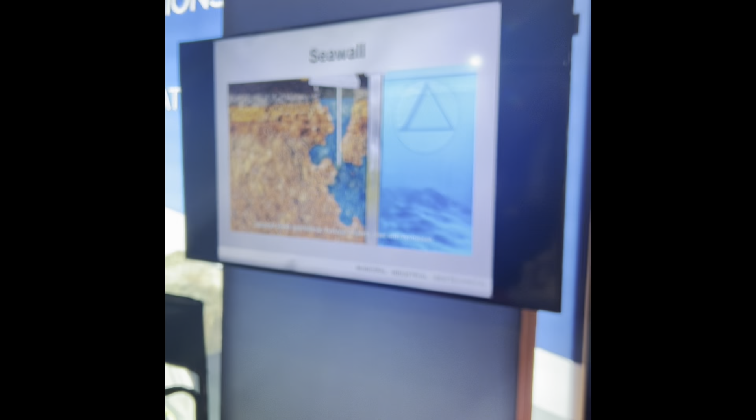So in that aspect, we would do something called grouting around the whole structure, and then it's all waterproof. Because if you think you only have one leak and fix it, water has already traveled, and now you see another one and another one. So depending on how many cracks the structure has, you may be best off just grouting the entire thing.

He works with the stack running off of a PC. Yep, so you can use a PC, an iPad, tablet, anything like that, and plug it into the Volanti system. And Volanti runs the stack on its own power, and runs the stack on the screens.

Yeah, definitely. Well, let's do this. We are leaving Friday, so maybe.

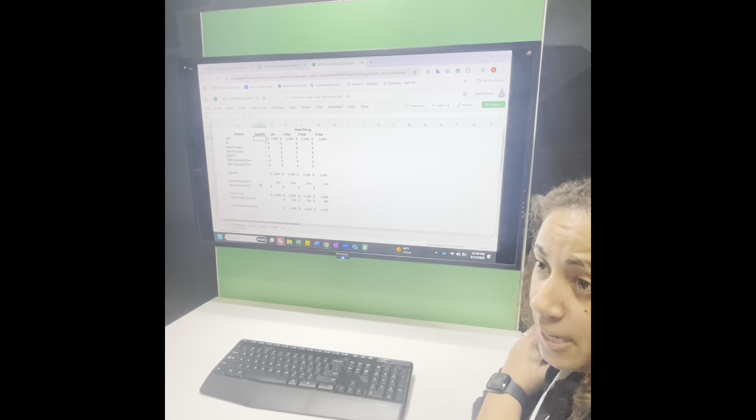And there's no limit on the quantity of projects -- completely unlimited. I haven't seen anyone max out, and I've been here 3 years. We've got users that have used our software for 5 plus, 10 plus years.

Any questions? Yeah, I can scan your badge, and then send you some more info. Definitely, I want to see. Yeah, I want to get you set up together, try to get you a demo on a trial. That way, when we do the demo, we'll be more geared towards your business, and it'll make things more understandable right now.

Measurements by takeoff, so you can see what's all included, and then item cost by takeoff. So if you attach what we call an assembly, which would be all of your materials together, that's where you'd get this material list, whether it's labor or material. You can build it out into an estimate. So here's the dashboard, and then you'll go in and enter your pricing here on the back end, add in markups, material cost, overhead, additional and non-measured costs like drawings, lift engineering, stuff like that. We can have it all in there.

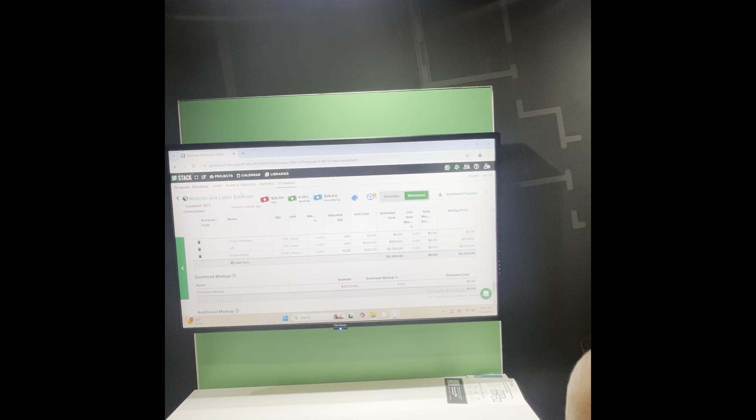Now, can I build myself a template? I want you to look at all my plans, I want to have my list of 25 items, look at it, and go from plan to plan -- that's my template. Every engineer has a different symbol. So I can program it to look for this symbol, when I say, look for these 25 items.

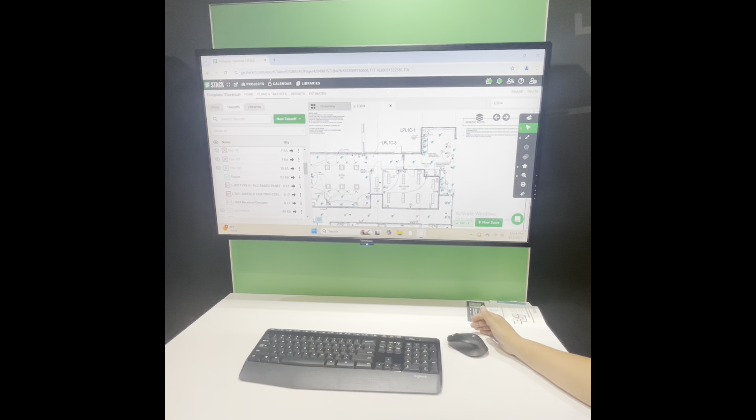We could do that, but it would take some time with our trainers and things, just setting it up in your account. But once everything's set up, it would be smooth sailing, just go in and, like I showed you, point, click, and it'll recognize it. So there will be some work on the front end making sure we have what you need and import it in there, like your templates and stuff. But yeah, we should be able to help you.

The OCR is easy for me to do -- I'm gonna look for this spelling, look for this word. But also, I want to look at every plan. Right, I look out for that. We want the images too. Yeah, I can find out more on the back end for you once we're back in the office and I talk with our dev team. But yeah, I don't see it being an issue.

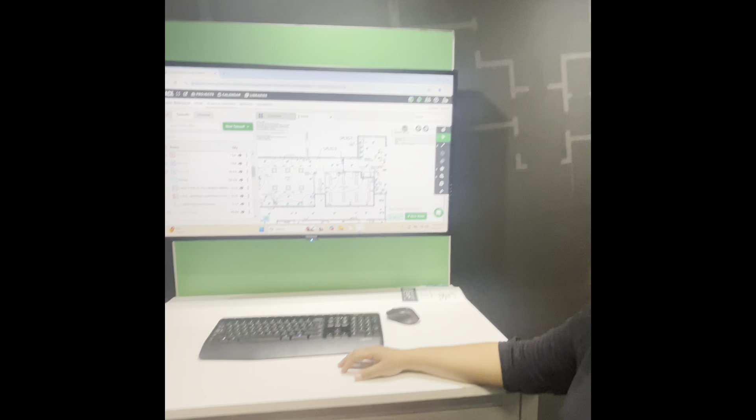What's the pricing structure, any trial period or something like that? Yep, we do have trial periods. Iris, can we sneak in for pricing? Sorry.

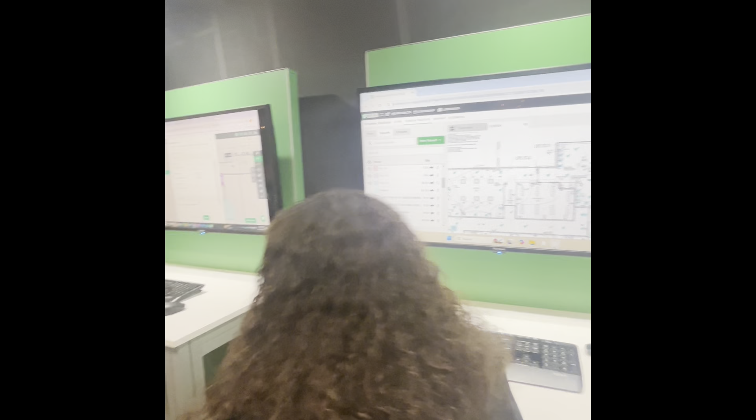They're a little pricey, this would be for your personal use. These are the DJI microphones, all wireless, with up to 200 feet range. These things are amazing, what's the price tag? These ones are about $350. But as far as audio quality, you could be 10 rows away just recording video. I could be here talking and it's like as if I was talking this close to you. And where would I be able to buy one? You can buy these directly from DJI. Yeah, they're pretty awesome.

Thanks a lot. The project manager would have a job box on site -- it's protected, a steel case, with the battery underneath. 100%.

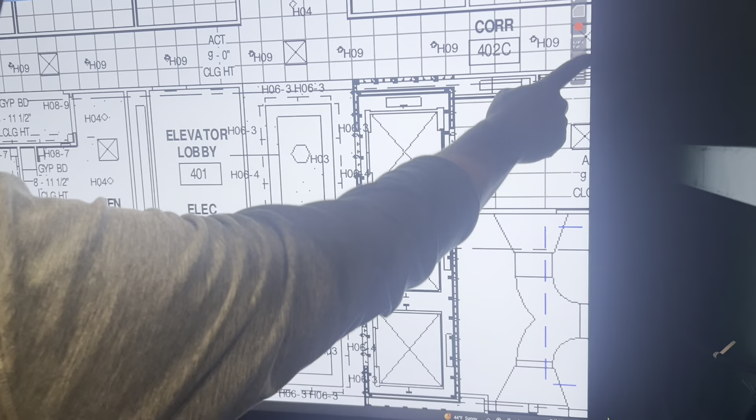Right now I'll demo how Stack uses the measuring tool. So if you pull up your PDF, you can zoom in on it a little bit. Just grab your finger and click on your measuring tool. You set your ratio, so I'll do for every 1/8 inch is 1 foot. Click on your tool and I can just start touching my touch points, and it automatically gives me all the measurements.

Very nice. And then does that integrate into a takeoff program from Stack? That would be a Stack question.

What about a red line or some notes? Absolutely, so you can do all of your redline markups. You can draw anything you want. If you want to pull up a text box, you can just type it up, start typing, and it pops up on the display.

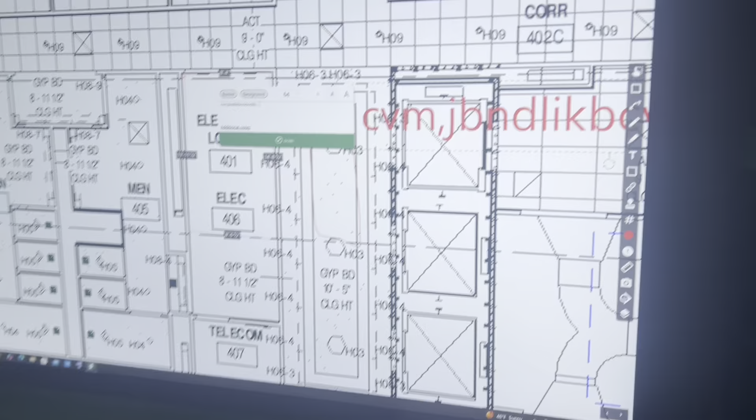It's connected to Stack. How is it? What are the programs that this hardware runs? Our company, Volanti Displays, is a display manufacturer. We design and build everything that you see here. The partnership between Volanti and Stack is for every product that you purchase from us, Stack offers a 1-year free license of their build and operate side of the business.

You display their programs, but you can also open up a DWG. Yes, you can. And how would it function here, how would I look at it? Same way I'd be using it as a touchscreen. Yes, you can pull up any software program that you want. All of our touchscreens are completely plug and play with Windows 10 and 11.

So whatever software you do choose to use, whether it's Stack, you can use your email, browse the web, anything, and connect a mouse. Yes, sir.

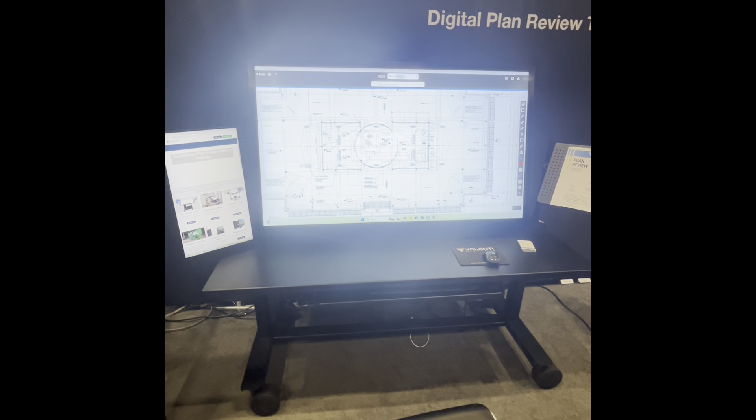You want to give a demo of how to mark it up? Yeah, of course, let me see. The touchscreen goes from a 90 all the way to completely flat, for sites.

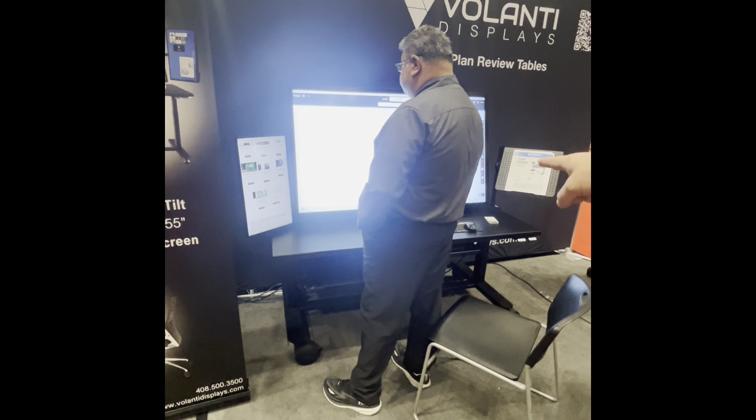How much does this one go for? This one, everything you see there is $13,000, and then we're running a $2,000 discount on it. This one right here is everything you see there is $11,000, and we're running a $1,000 discount. This is what's called the Plan Review Desk, and then you have this one right here, that's our Plan Review Job Box.

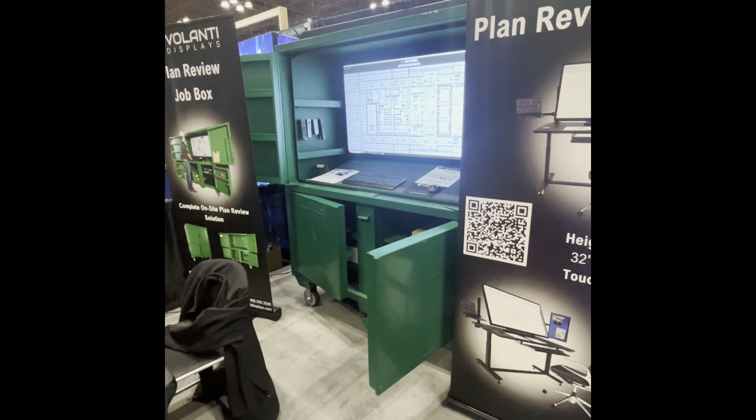So you get the Job Box, the 55-inch 4K touchscreen, computer, battery backup, printer, keyboard, mouse, webcam, soundbar, Apple TV, Chromecast. You get everything, $17,000 out the door, and we're running a $3,000 discount.

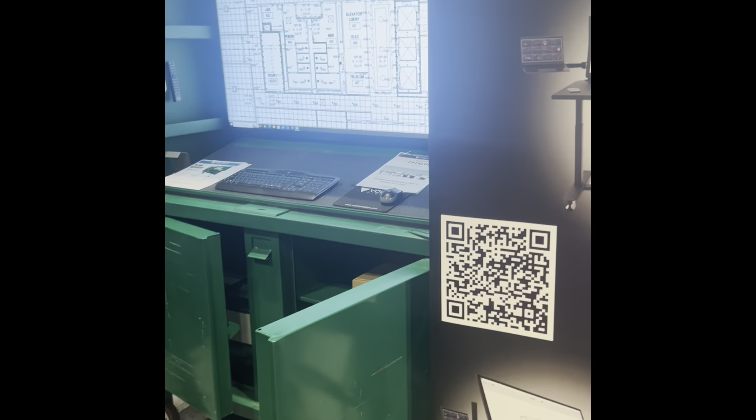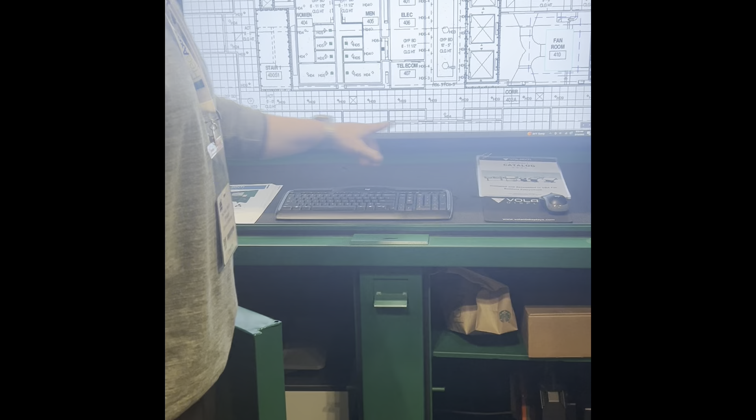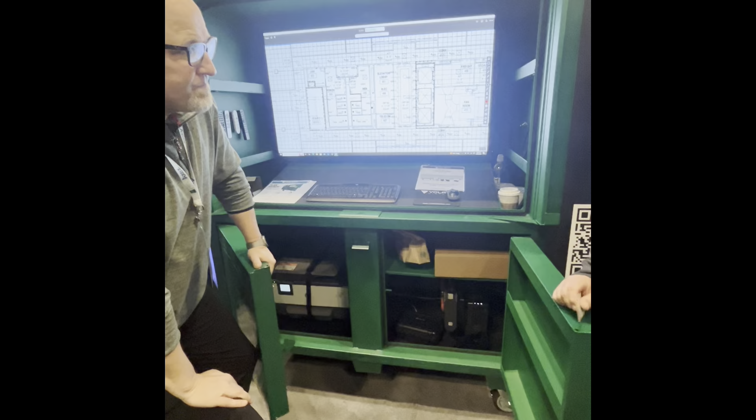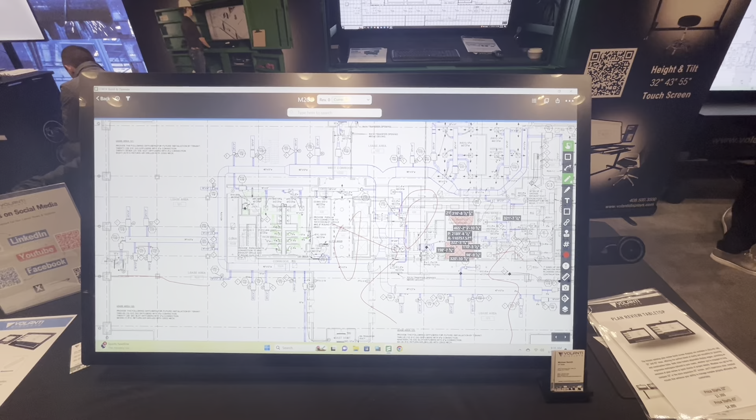What are the features of the touch screen? The features of the touchscreen are that you're able to zoom in and look at the clarity, right? I used to go to a job site early on with a small iPad, and it was a little bit of trouble to go with the AutoCAD. So how does this improve on that interface between an app with an iPad, a tablet that runs an AutoCAD app, versus this integrated screen system and the monitor, basically in your office, gives you that whole flexibility. You're not putting stress on your vision, you're looking at the clarity of the product.

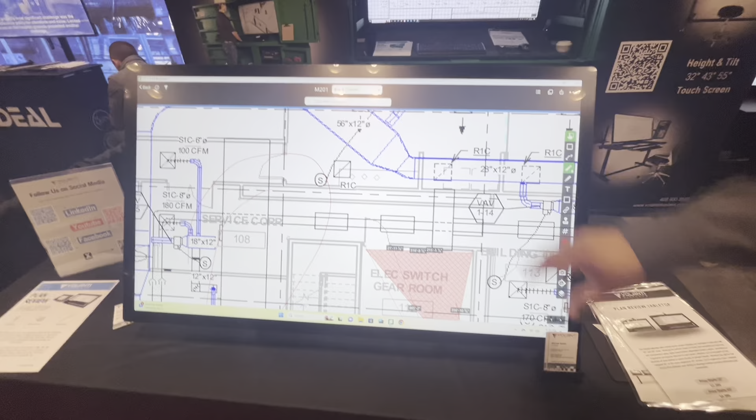And I can bring it to the site? Well, we have mobile ones. This is a desktop version, what we call a tabletop. Does it connect to your PC or Apple? Exactly, it connects. If you wanted to connect an Apple, you use a third-party accessory for the touch, but basically it's Windows 10, Windows 11.

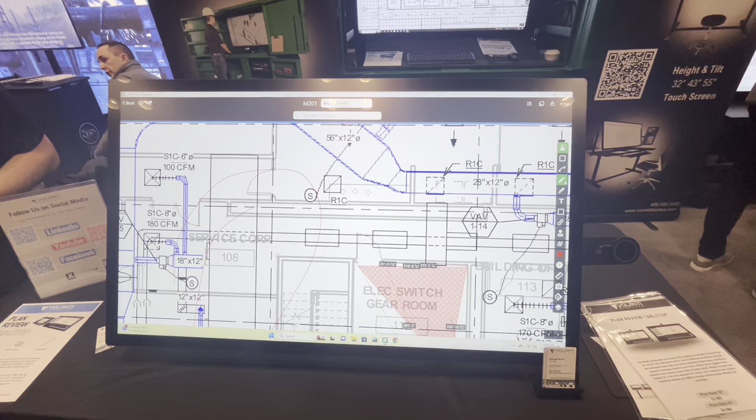And how does it open, what sort of files? It runs on any program you have. DWGs you open up, and then you can use Procore, Bluebeam, and any program. And what sort of drawing markup manipulation tools are there in that bar on the side?

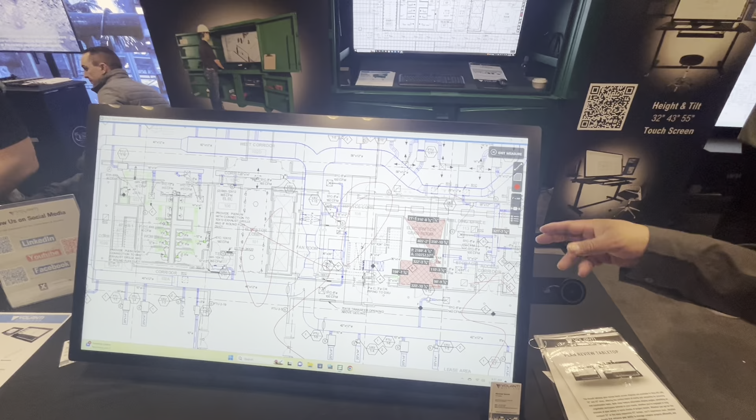This is a program called Stack. Stack has a different variety of functions, such as allowing you to do measurements, take-offs, and markups. What sort of markups? Redlining, notes. And how do those notes interface with it?

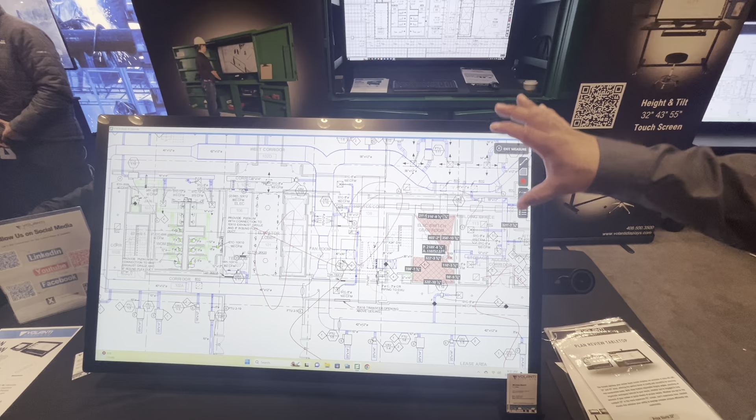Those are all questions for the software, we're not a software company, we're more on the hardware, the screen hardware. The software is a company called Stack. So all the technical details as far as their software and development, you can get more details from them, but we're more on the hardware. We're promoting their software, what the capabilities are, what it can do, what it's capable of.

And on-site touch screens with tilt capabilities that go from the PC, and they're plug and play. Basically, you can connect any particular PC.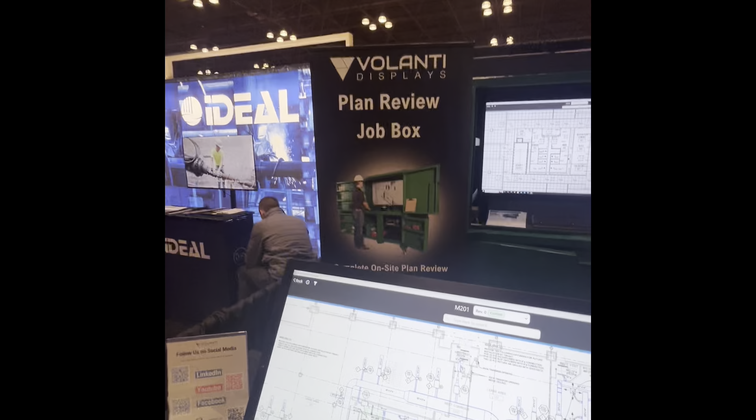Plan review, there's a plan review table. There's a 43-inch, we do the full touchscreen monitors. They're fully assembled in California, industrial grade, robust, 3 mil, dust free.

This is a charger, wireless charger. We also have wireless charger.

Pylon signs for local strip malls.

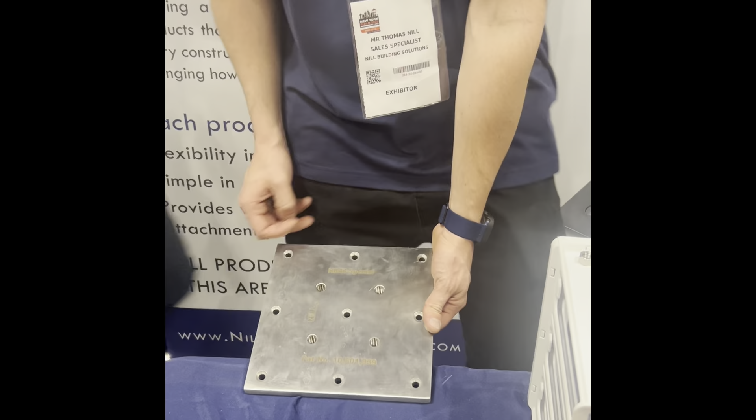Yes, so there's no hole over it. It's now a waterproof threaded port, so now we give you the ability to fasten down 6 times for that one connection, so we have tremendous strength. We give you the ability to cleanly waterproof over. All of our products come with a rubber gasket seal for when you're waterproofing, so nothing gets inside.

And when you're ready to attach, you pop it out and you're ready to connect. So I'll show you here - this is our whole patented system. It also has the slots in the post as well for you to feed your cable wires through. This is just a demo.

We make these 48 inches. We do mahogany, ipe, pressure treated, steel as well, all the same system. So this is our bracket here. This is Siplast, waterproofed over. All that's showing is that attachment point. You install our threaded rod.

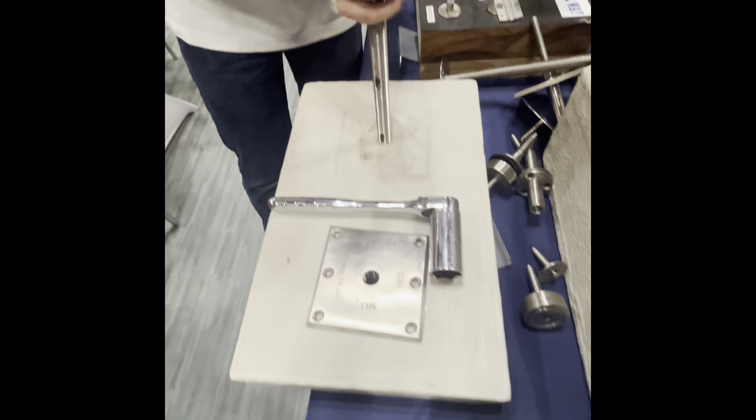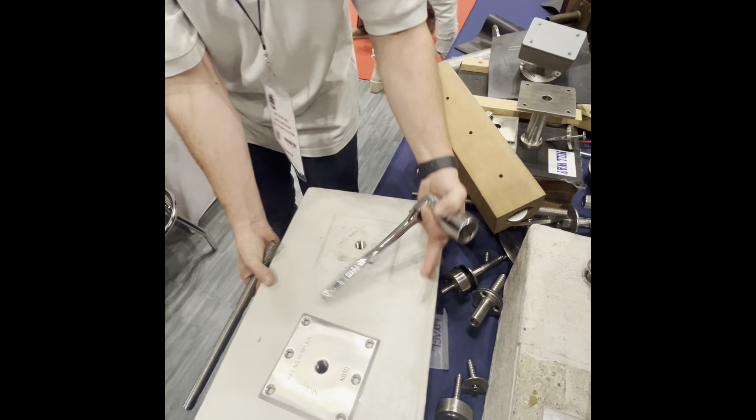Tighten it too much. There we go. So this is our waterproof threaded port. Water can get in there as much as you want, it's never gonna leak. So you install our threaded rod.

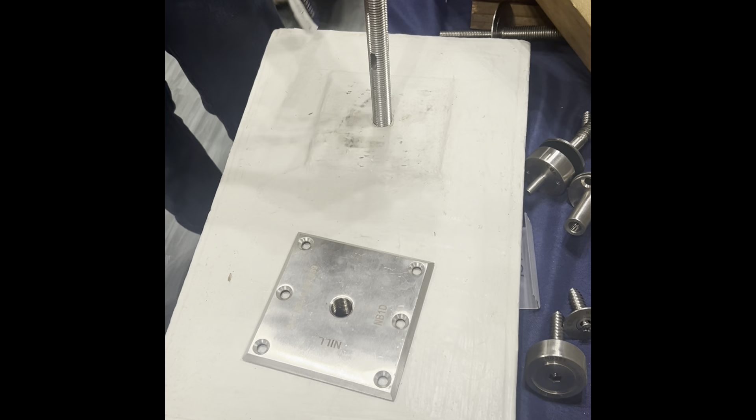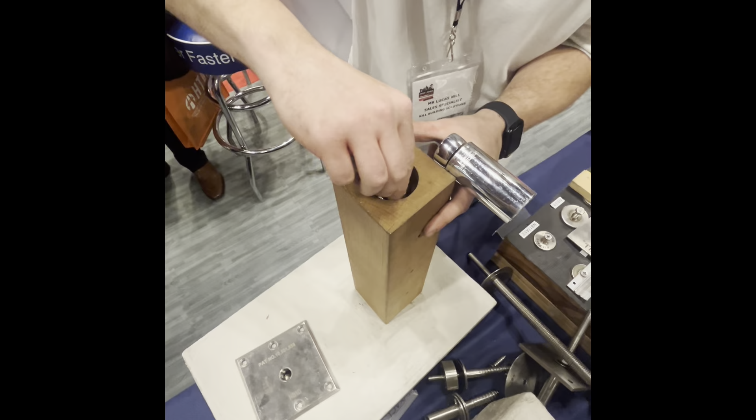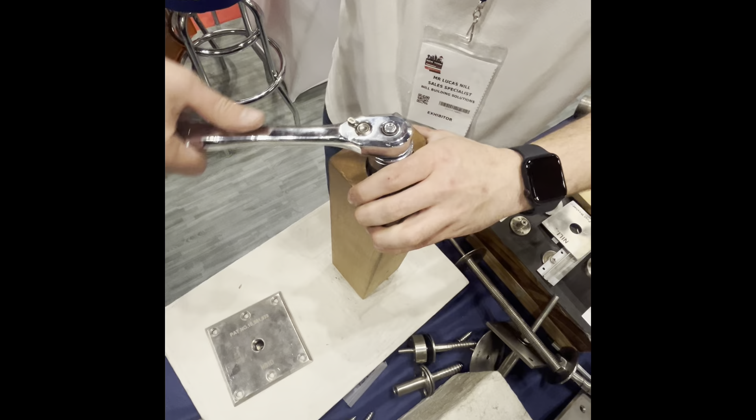It's great too, because sometimes they have to change out the posts. All you have to do is take off your nut and washer. So they all come counterbored out, bored all the way through. Now you install our post, put a washer, and a nut. Now it's as simple as that.

Not going anywhere. What sort of applications? Post applications, we do everything on the exterior end.

Give me a scan as well. Yes, of course. So it doesn't matter what the membrane is, it could be copper, rubber, it doesn't matter.

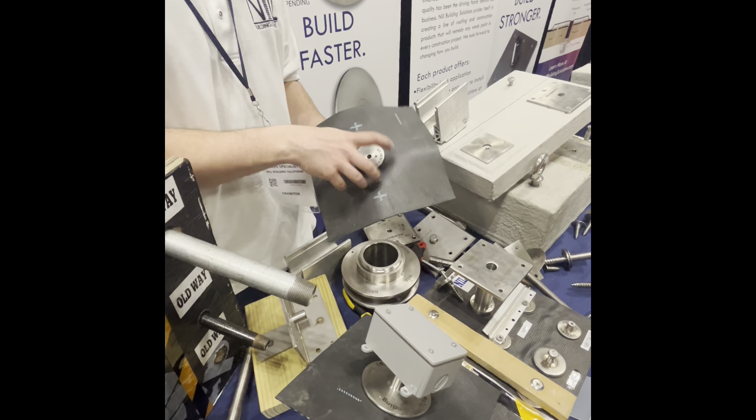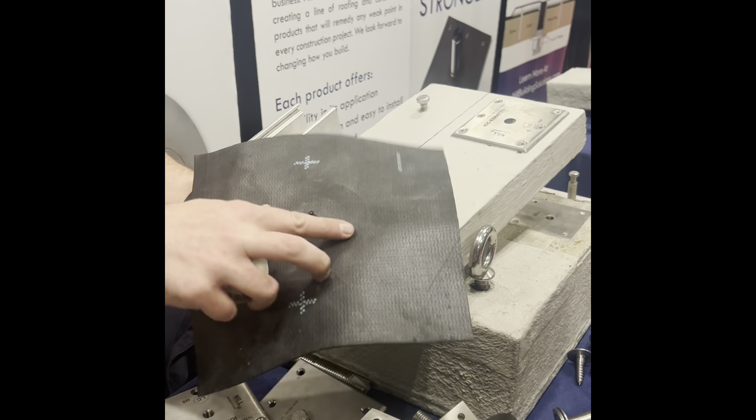So all of our products have a waterproof threaded port. So this gets installed, you put your membrane over, and now you create the perfect sandwich seal. They all have a caulk groove as well, so you are encapsulated into the structure. It forms a perfect gasket seal, and you are also sandwiching the membrane as well.

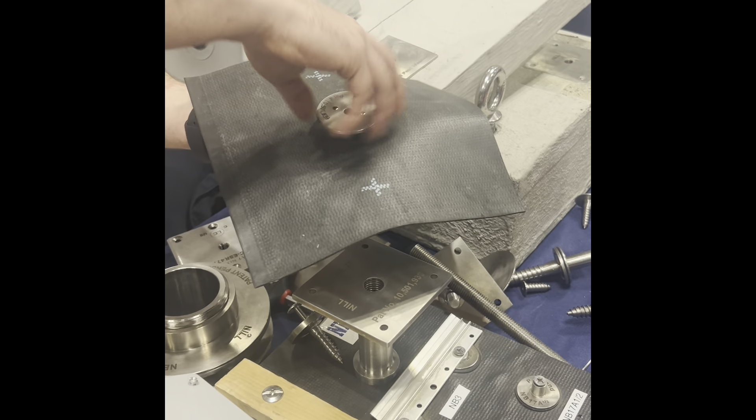Now you have the perfect sandwich seal, and you are ready to attach your L-foot for your solar.

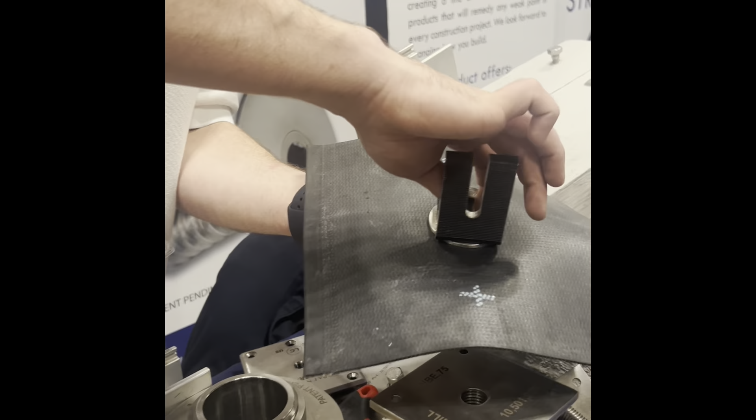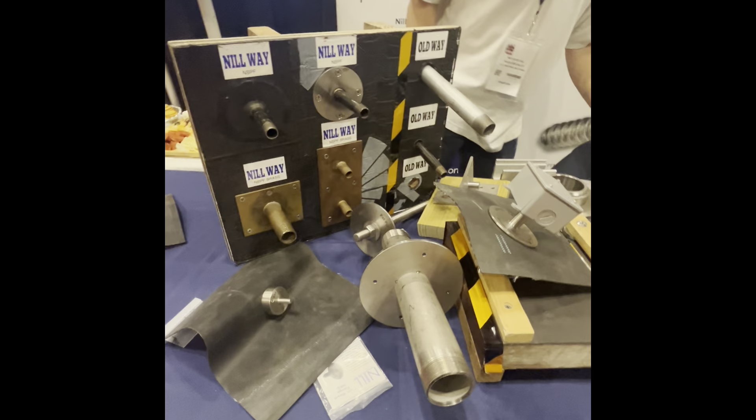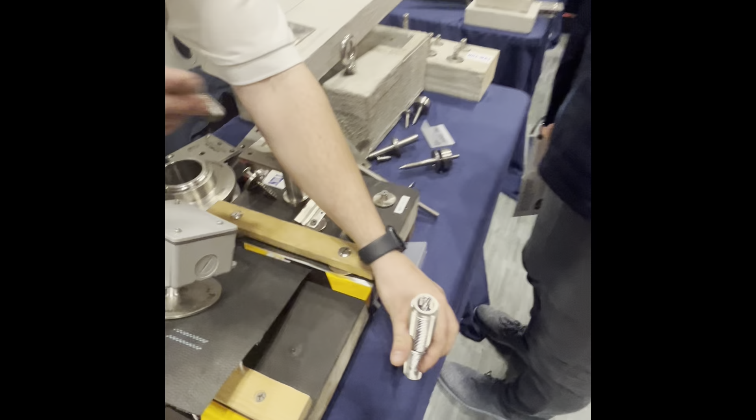We made this one recently for a floodproofing company. So same kind of thing, this thing gets dropped into the epoxy, and now you attach whatever it is you need right into our waterproof threaded port. We have tremendous strength for any application.

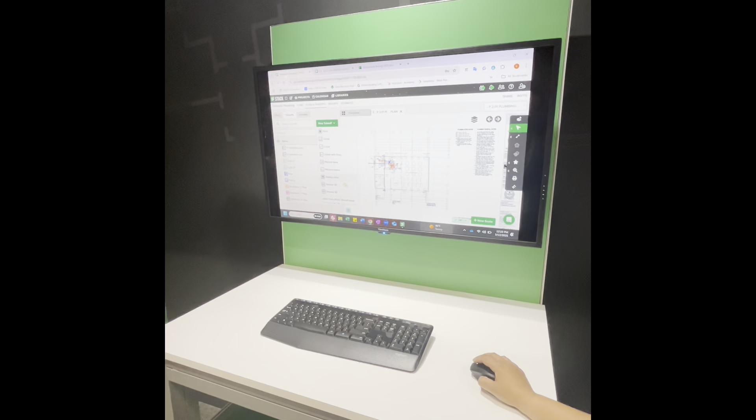Hey there. Hey, so this is a project management tool? So, takeoff estimating. Right here, what we're looking at right now is like if we were doing a plan set for plumbing, I have a couple different options for the type of measurement you would like to do. So you have area, counts, linear, things like that. With this one, we're doing a linear measurement with a drop.

Going in, that way we can count and see the piping and things like that. So these are what your measurements would look like from there. Then we can actually go over to the reports tab and see your quantity based off of what we measured, and then the item cost for those materials - so that would be like your material list there.

And then we have a way to show your unit costs, your takeoffs, and at the bottom is a spreadsheet that can print out. So right here would be your spreadsheet. You can export right into Excel, CSV file, or project calculator.

If we're looking to add in our own pricing and things, we can come here and worksheet by name, and then labor costs - you'll have your waste, add in all your costs, adjusted quantity, extended costs, line markups, material, non-measured, things like that.

And how is this parametrically attached to scheduling? We don't have scheduling within our software, but it is something that we could have an integration with, because we have these different ways of downloading the proposal and things like that, but then we can share an invite onto this plan also. Yeah, that's kind of a quick overview. I'll show you the proposal also to give you a better idea what that looks like.

Once the markup is done, it goes directly to proposal seamlessly, and that goes to a client, with the client's name and company name at the top. Here's the materials breakdown, quantity, transparency. Clean, seamless.

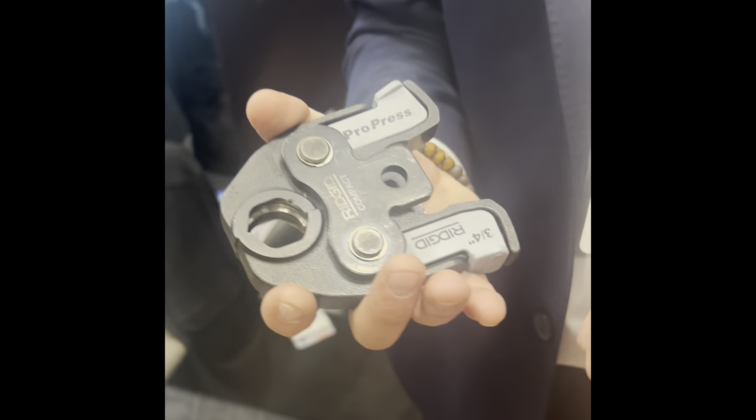If you look at RIDGID's jaws that they produce, this is clearly a RIDGID jaw, and it has ProPress on it. So ProPress, it's kind of a point of pride, I would say, that you have a tooling manufacturer calling out the fittings that should be used on their tool, because this is a trade name for Viega.

Viega's better, I would say, in the fact that they've been around for 125 years. There's a couple of other manufacturers, but namely, why German? Because we're one of the only ISO 9001 manufacturing facilities for plumbing and heating products. That's important to understand, because when you get one of our products, you're going to get the same thing every single time—it's not going to have a slight tolerance in it.

Sure, which can become problematic in the field. If it's got a tighter tolerance, now you're trying to bang fittings onto the end of a piece of tubing, and you might roll that sealing element.

Can you describe what ISO 9001 is? ISO 9001 manufacturing means that we're super precise—the manufacturing that goes on in our facilities is measured at a very, very small measurement. The metric is fine. In layman's terms, fine metric, yep. It's an oversimplification, I'd say, but in layman's terms, that's essentially what it is. Why is that good? How does it benefit you?

It benefits you because you're going to get a consistent product every single time. In addition, we held a patent on our unpressed connection fitting detection system. What we've done is notch the copper on the inside of the fitting under the sealing element, and that displaces water or air if it's not pressed.

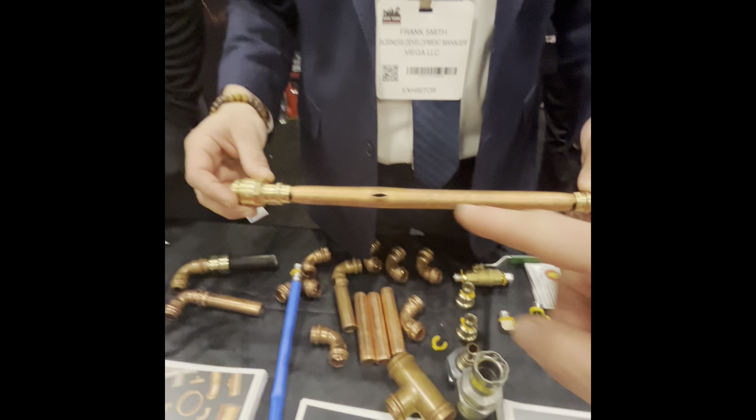So if you look at this burst test we did, you see that the tubing failed before the fitting did. Now I do have brass fittings on there, and they're going to be the same nominal wall thickness, because it's ID, right? It's ID copper, same ID here. So the wall thickness of the brass is the same, it's just a different material.

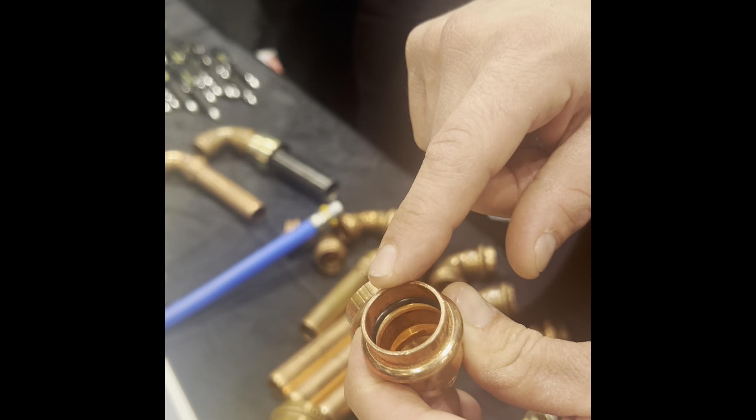But the same thing would apply here if I did the same test. This is going to be stronger than the tubing. That's the whole point of making the system a press fitting, right? So it's going to be heavier than Type K copper, and it's done so on purpose. If you look at the manufacturing standard on press fittings, you're going to put a tool on this that exerts 32 kilonewtons of force, so you need that extra copper in order to make that press joint.

Right, so I'm just going to press it dry for you, so you can see that there's a lot of pressure being put on that. So by manufacturing standard alone, it needs to be thicker than K. Why is that important? It's the thickest part of the system now, because it's thicker than the tubing you're putting it on.

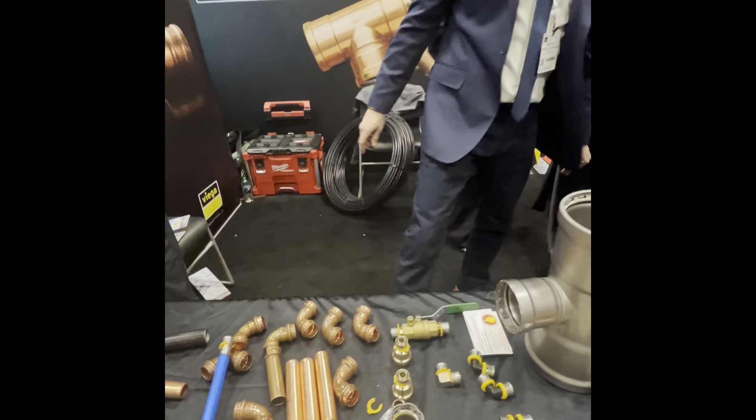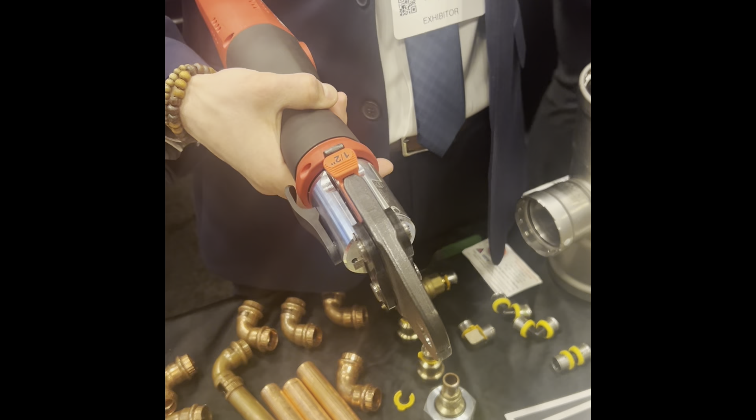I love it, man. You do this exactly the same as we do with our metal system as well, and it also includes the press jaw for steel. Sweet, I've got to get this in front of my students. Sure, anytime.

Once I've done that, I've made a permanent, non-movable connection with PEX - I can tell you what it's called. I haven't expanded the tubing, put it under stress in any way. I didn't take advantage of the properties of PEX, its strength and memory, which a lot of other connection methods rely on. And there's no cinch clamp, no extra tool.